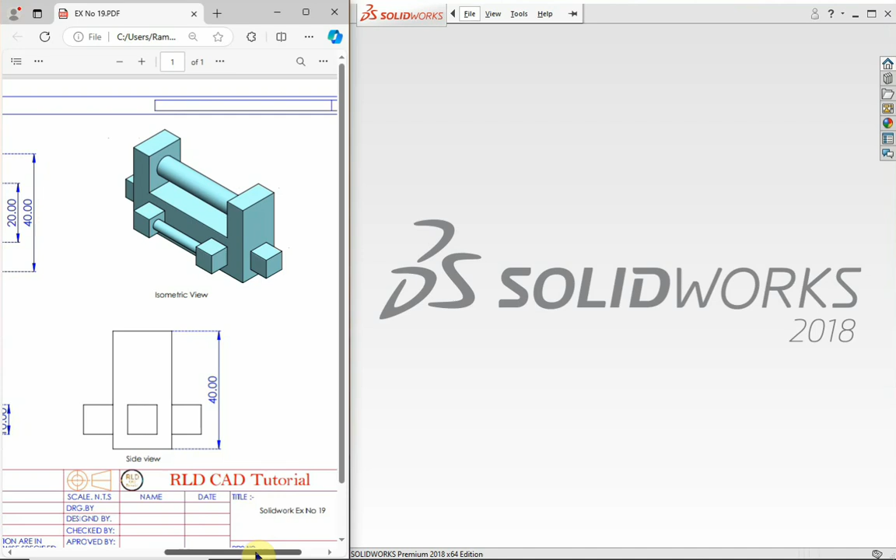So first go to SolidWorks, press control N, part, and OK. Change your unit if you haven't already changed it, otherwise you have to change it to millimeter in units.

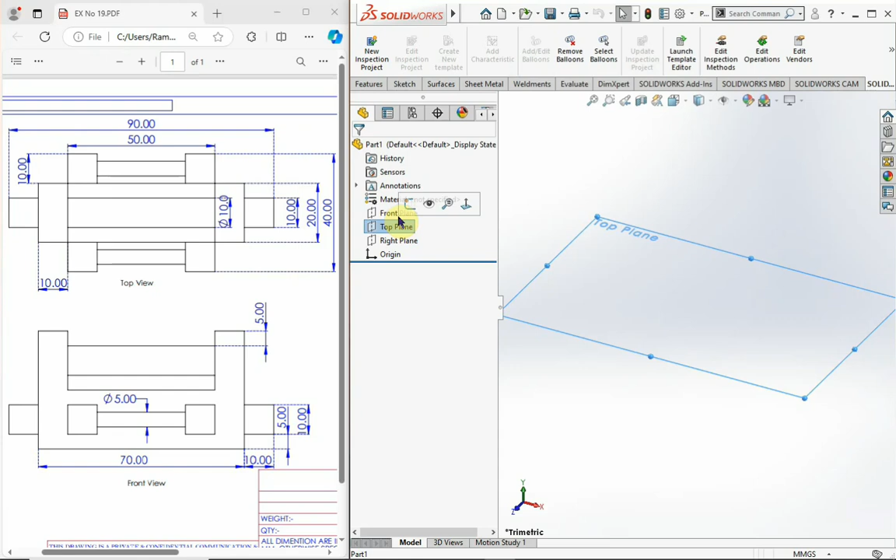I am selecting the front plane because we want to make this geometry first.

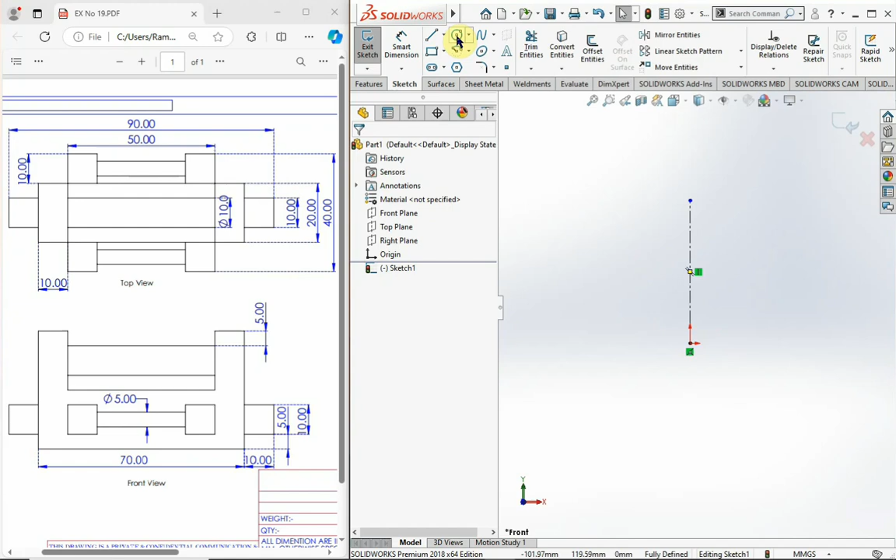And I am choosing mid plane, midpoint line, and make one line from center.

We have to mention the dimension, which is 70. So keep 70 dimensions and OK.

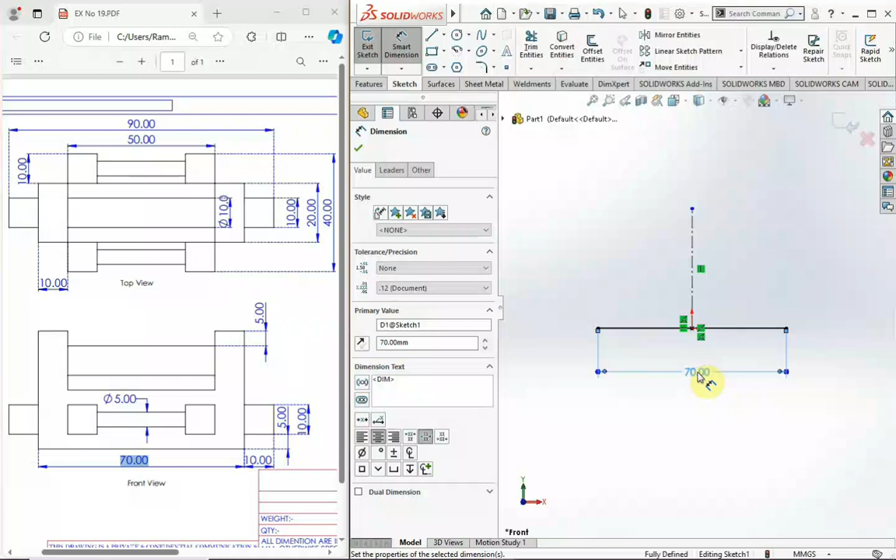Take a line and make this kind of geometry, as I am building it. You can make a similar geometry first.

Select this line, these two lines, and with shift key pressed select this line, hold shift, select this line, and make collinear.

Take dimensions. There is a mentioned dimension of 10, so this is 10, and this is also 10.

Even you can see in the side view, the dimension from top to bottom is 40.

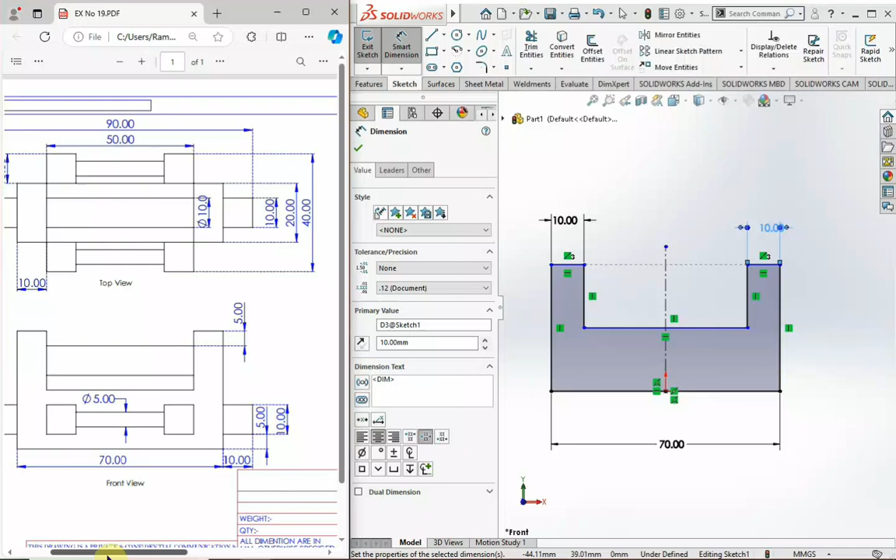Select this top to bottom and make it 40, and this is our second dimension.

This is 20, this is 20. Okay, now our geometry is fully defined, go to feature, press

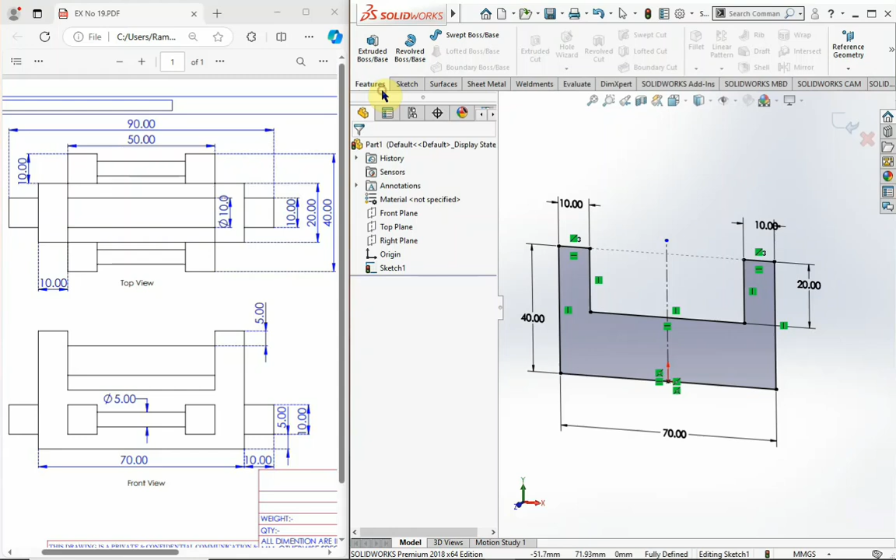Extrude boss base, keep mid plane. This is important, we even have to mirror these two features.

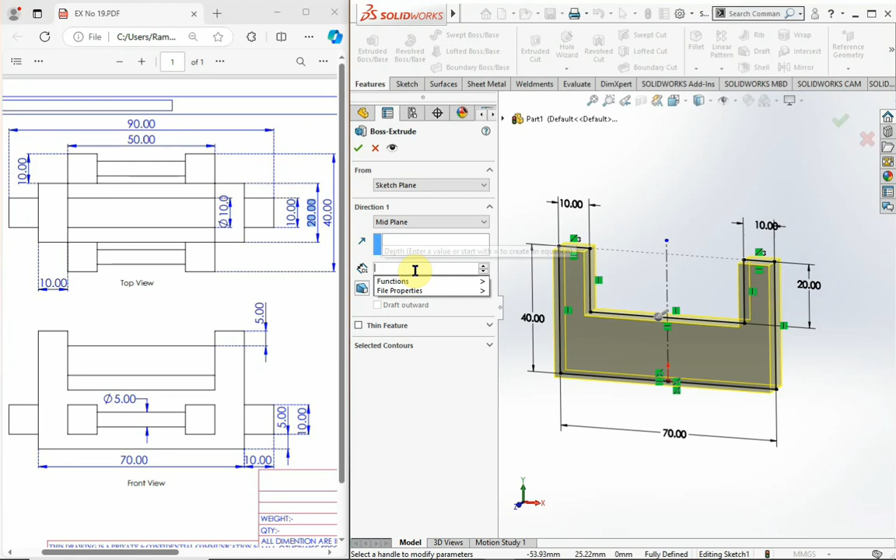There is a mentioned dimension, we have to extrude 20. So press, erase this, and make it 20, and OK.

And I am going to make another feature. This is OK.

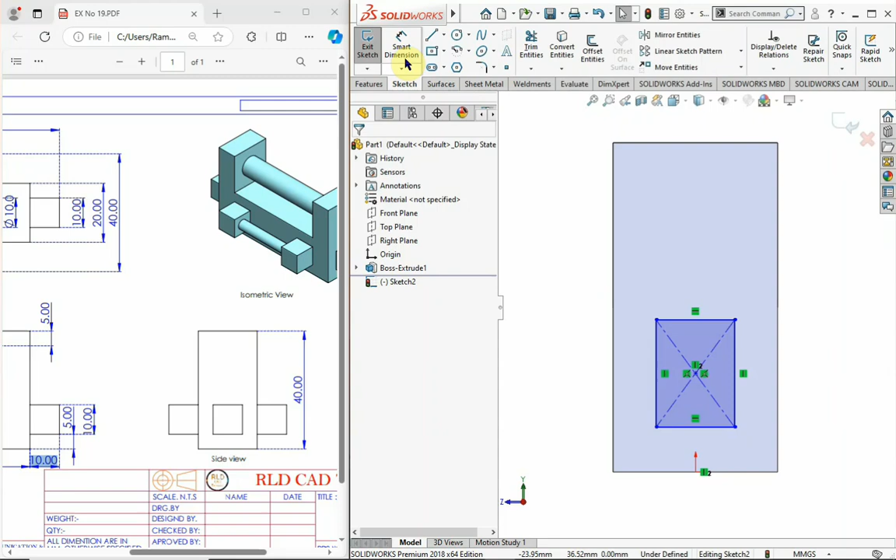And this is 10. Okay, all the dimensions, all the sides are 10 mm.

And distance from the center, distance from the bottom line of the rectangle part of our geometry is 5, there is a mention, okay, 5.

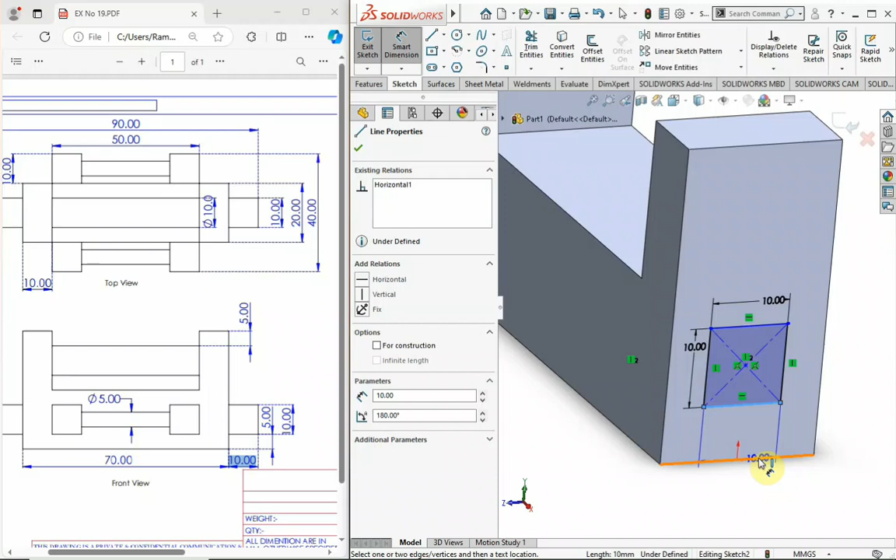So choose these two lines, and it is 5. Now our geometry is fully constrained.

Go to feature, extrude boss base, and how much we have to extrude? We have to extrude up to 10 mm and use merge result, because this is our one plane, one part.

Even I am going to make one more feature.

I am going to mirror this feature with the reference of mid plane. So you can check the

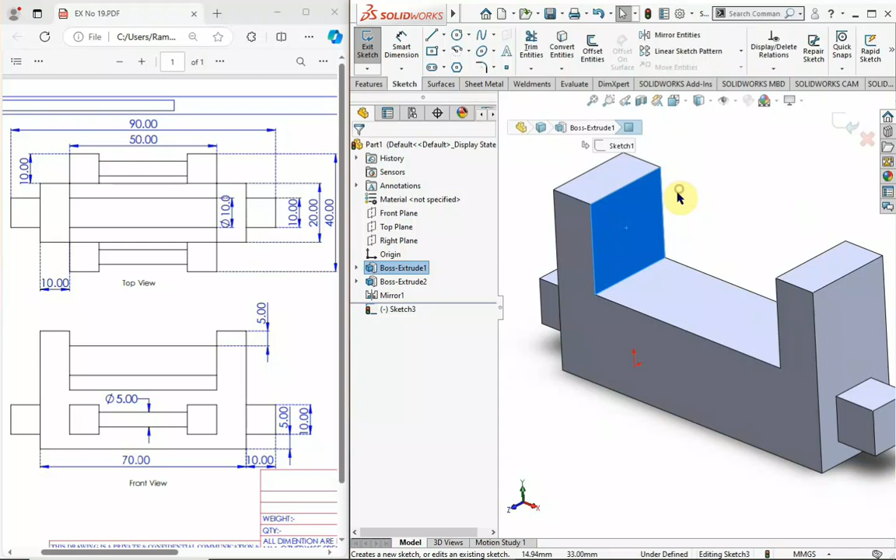This is our circle, at the center of this face. Select this face, normal to plane, make one circle. Take a center line from the center point, select midpoint of this line, and make it vertical. The dimension of this circle is 10.

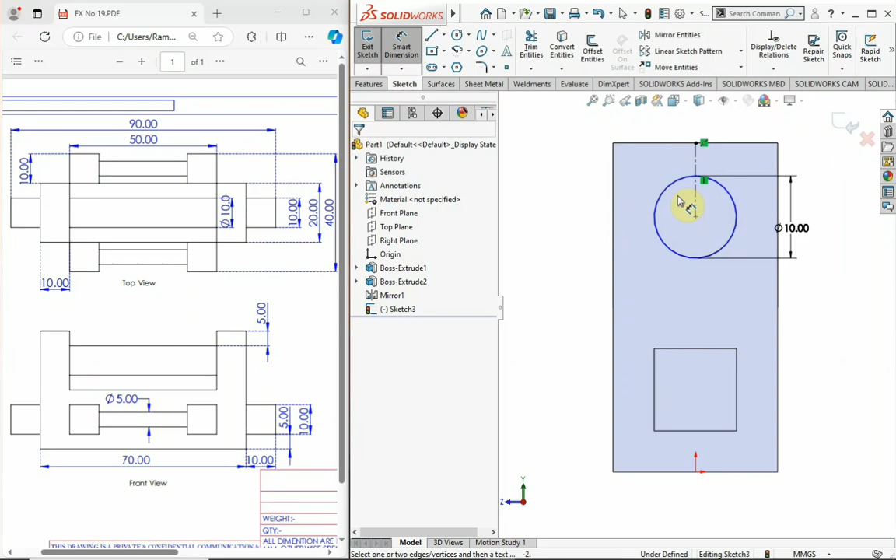So keep it 10, and from the center you can see this is our 10. The diameter of the circle is 10 and the radius of the circle is 5. So you can see this dimension from here to here is 5. How much do we have to make this dimension? This is our 10. Now our geometry is fully constrained.

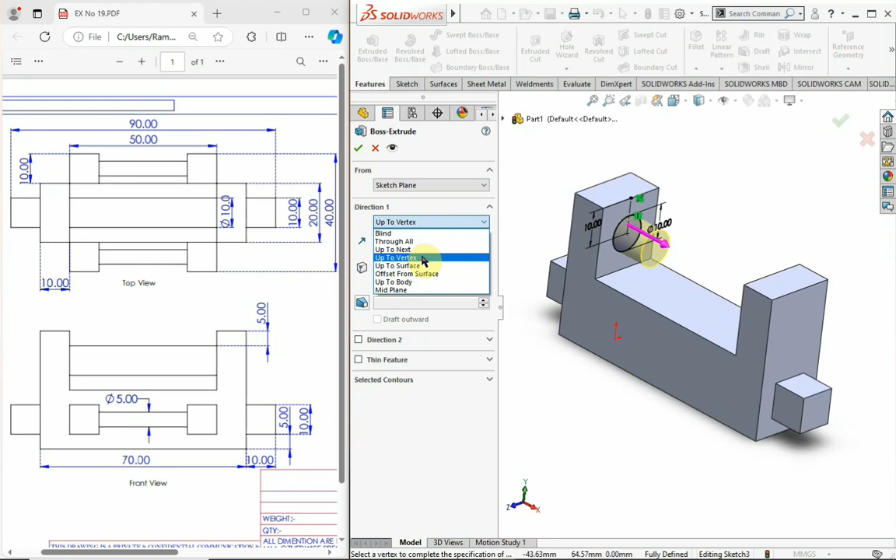Go to feature, extrude boss base, and this time I am using up to surface, because we want to extrude up to this surface. So choose up to surface, and choose this surface.

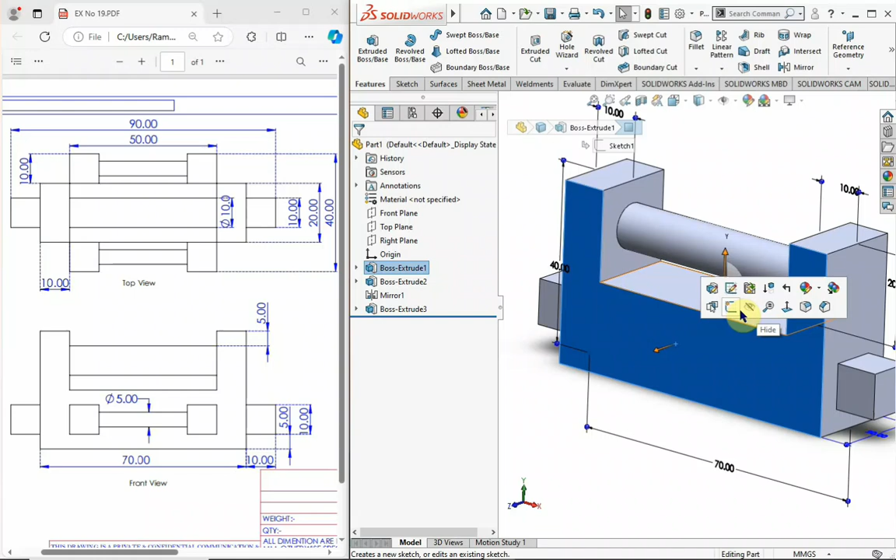Make one rectangle. The dimension of this rectangle is also 10.

Sorry, this is a 10. Keep this line and this line, and make collinear.

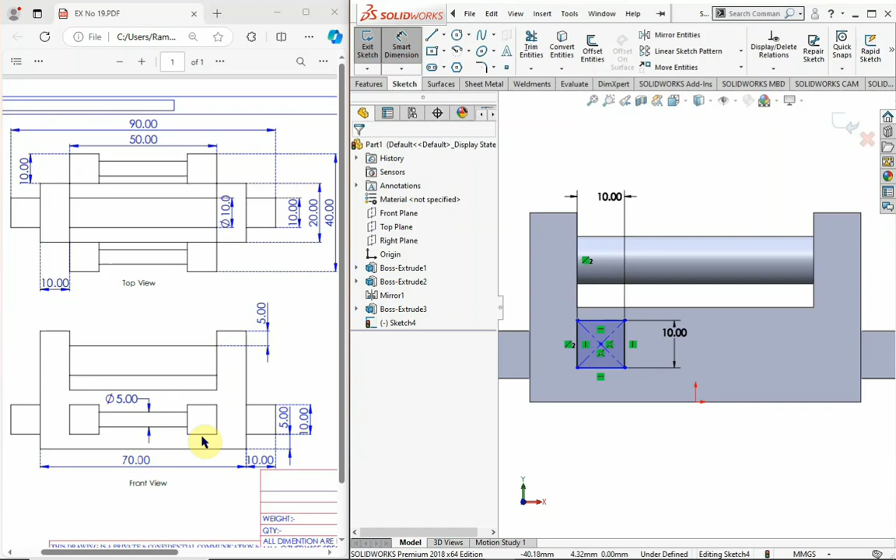Dimension from their bottom to bottom is 5. So our geometry is fully constrained.

Go to feature, extrude boss base. How much do we have to extrude? We have to extrude up to 10, as mentioned, and okay.

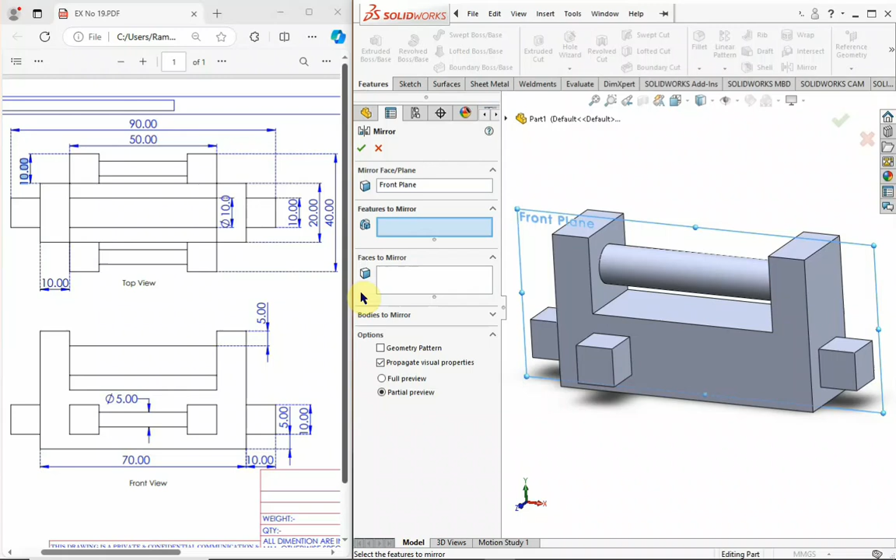Mirror this feature, and I am selecting front plane because this is the mid plane of this geometry. Go to mirror commands, go to feature, down arrow, and okay.

You can see the same feature has been created on the flip side.

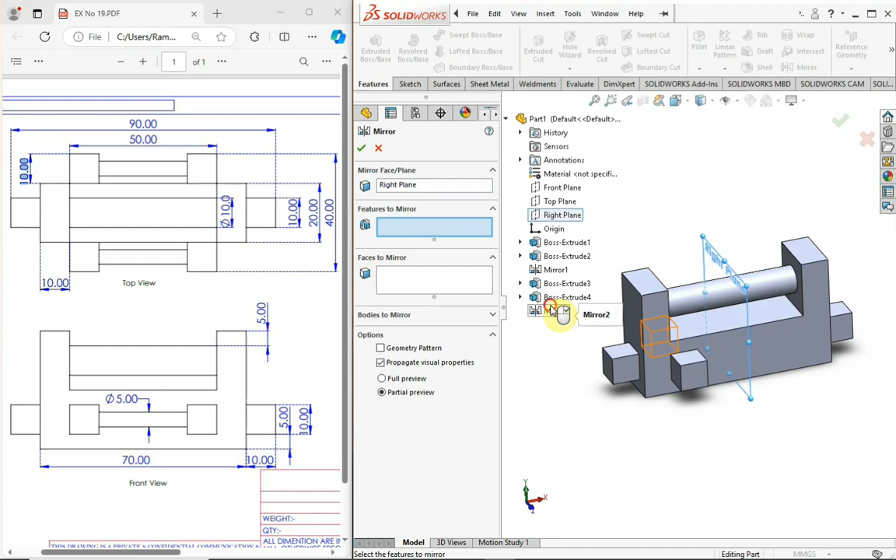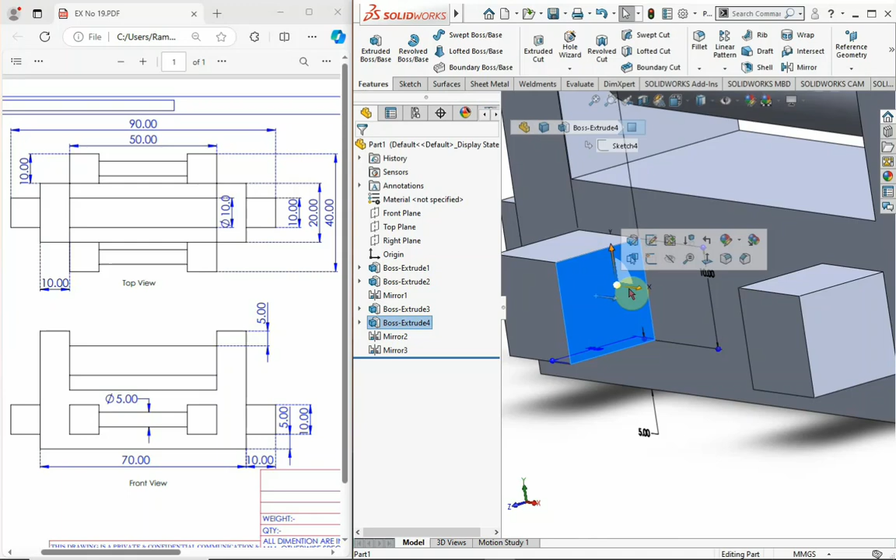Go to this surface and sketch, normal to plane, make circle. Diameter of the circle is 5, and this is at the center point of this.

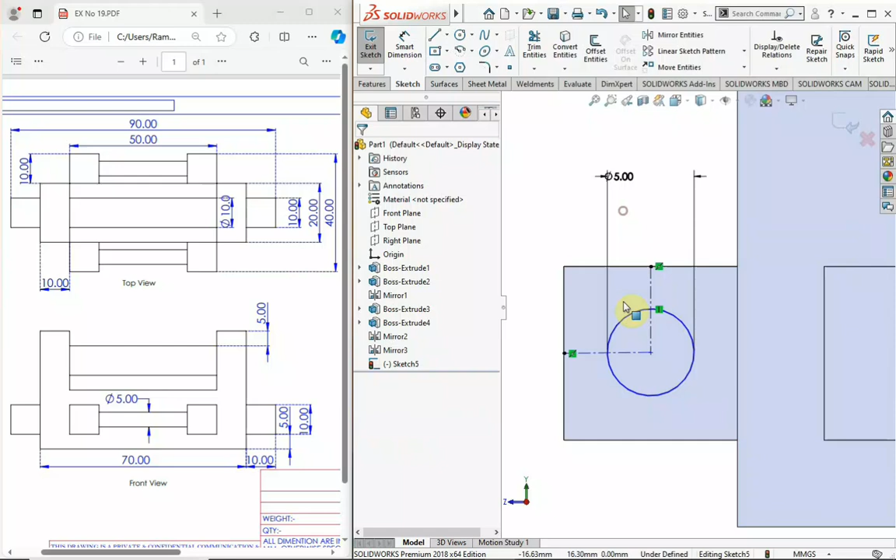Now our geometry has been fully constrained. Go to feature, extrude boss base, and keep up to surface, select this surface, and okay.

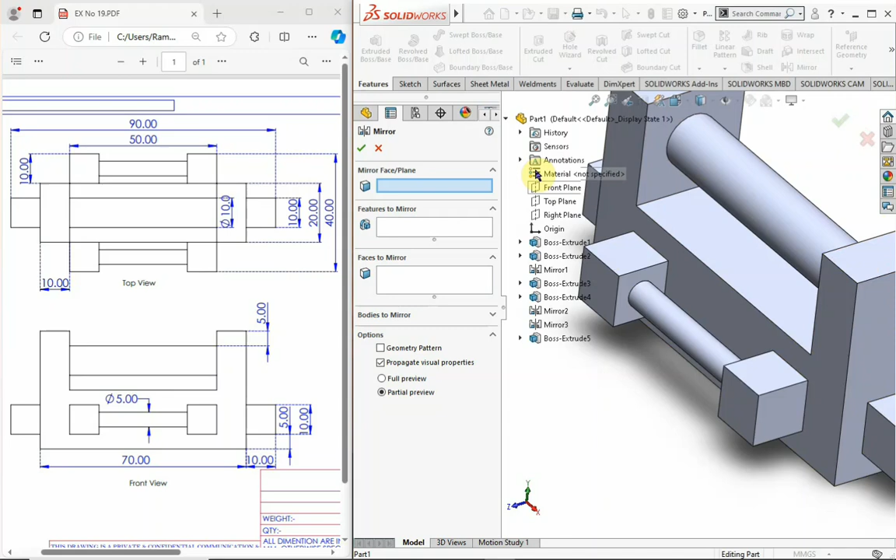Again I am going to use mirror commands because we want to flip side this same geometry. Go to mirror commands, drop down the menu, use front plane because this is our mid plane, and extrude boss base, and okay. Now you can see our geometry has been fully created.

Go to view orientation and isometric view. This is our isometric view.

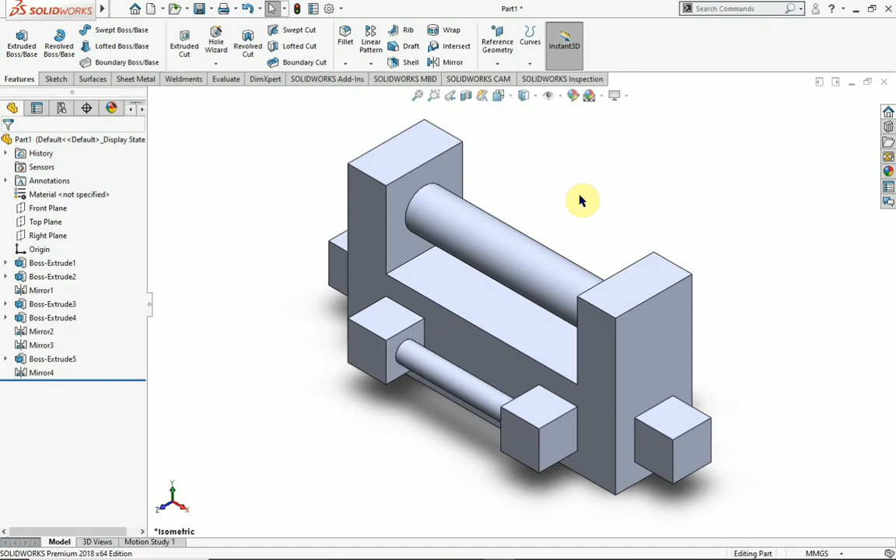I hope you've learned a lot of things, how we use mirror commands on different kinds of planes, how you can mirror the objects.